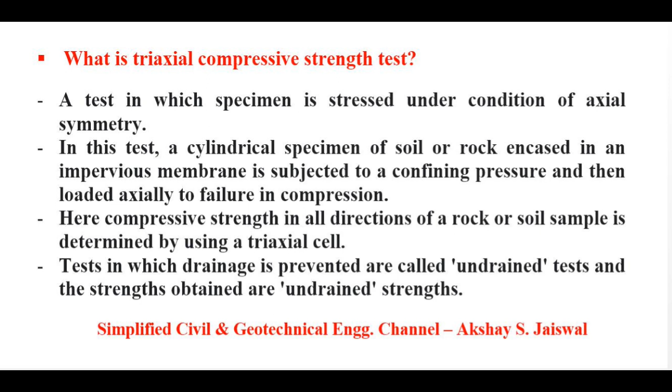Now we will discuss types of triaxial test. There are three main types. First is unconsolidated undrained test, also called Q or quick test. Second is consolidated undrained test, also known as S or slow test. Third is consolidated drained test, also called R test.

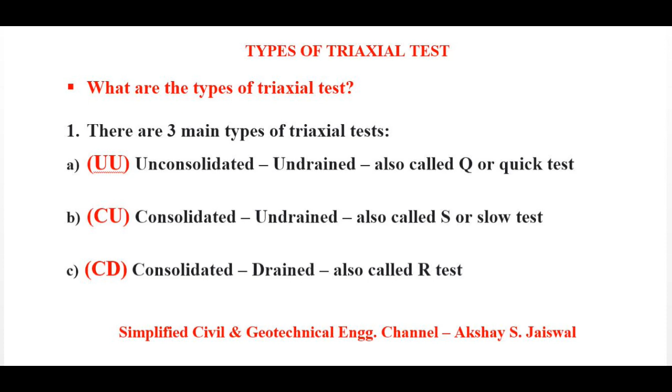Now we will see use of triaxial test. Point number 1, like cone penetration testing, triaxial testing is used to measure soil properties.

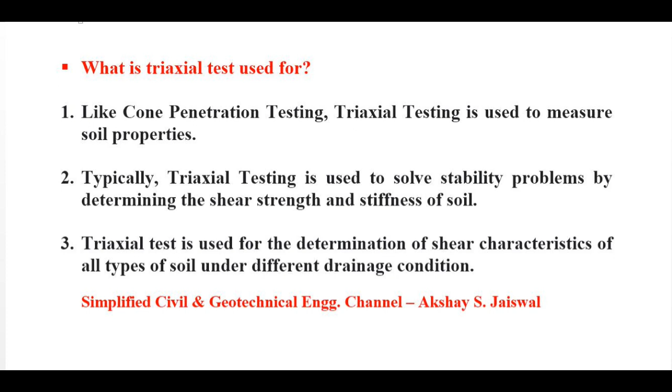Now we will see how you do a triaxial test. Triaxial shear testing can be conducted in two steps. Step 1, the soil sample is prepared and set in the triaxial cell, then the confining pressure is applied. Step 2, deviator stress is applied, which is an additional axial stress.

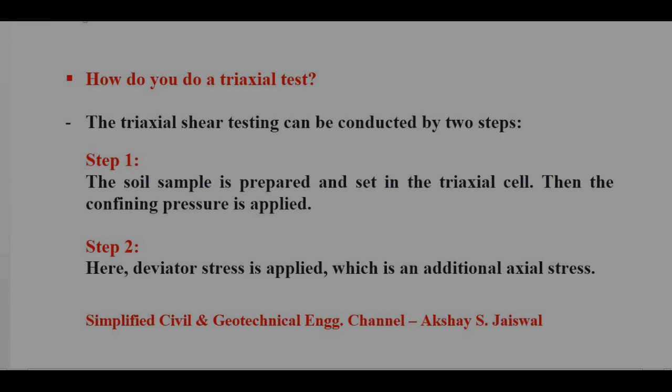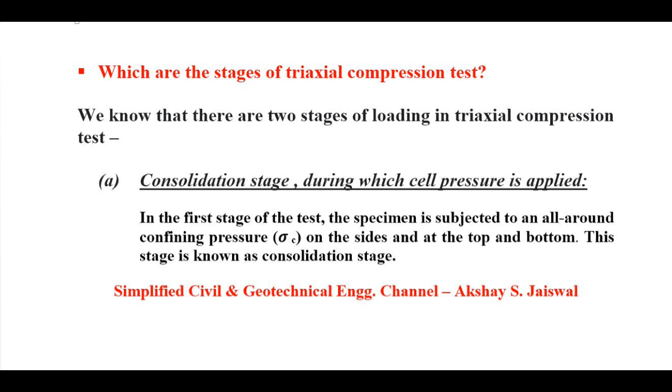Now let's discuss the stages of triaxial compression test. There are two stages of loading. First is consolidation stage, during which cell pressure is applied. In the first stage, the specimen is subjected to an all-around confining pressure, that is sigma C, on the sides and at the top and bottom. This stage is known as consolidation stage.

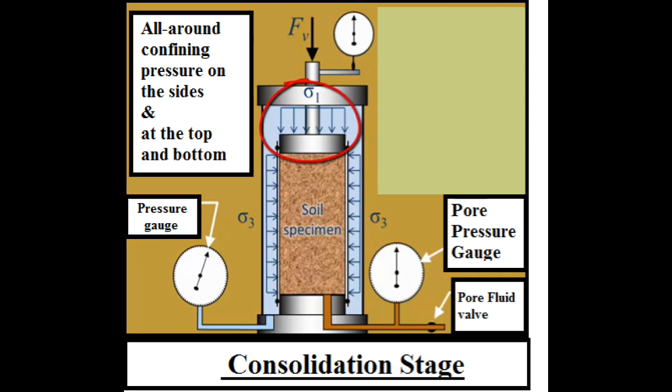This figure shows all-around confining pressure on the sides and at the top and bottom. The figure also shows the pore pressure gauge and pore fluid valve and pressure gauge.

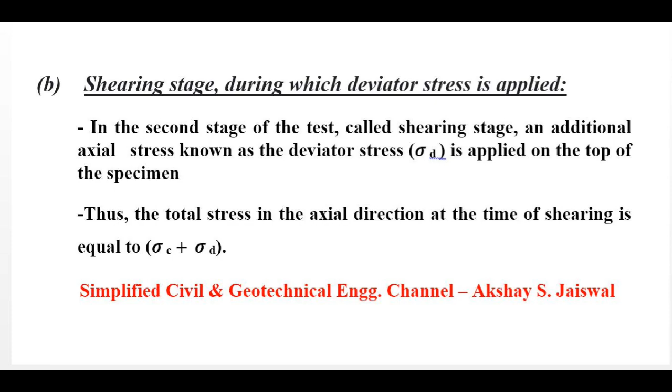Now we will see the shearing stage, during which deviator stress is applied. In the second stage, called the shearing stage, an additional axial stress known as the deviator stress sigma D is applied on top of the specimen. Thus, the total stress in the axial direction at the time of shearing is sigma C plus sigma D. This figure shows the shearing stage during which deviator stress is applied.

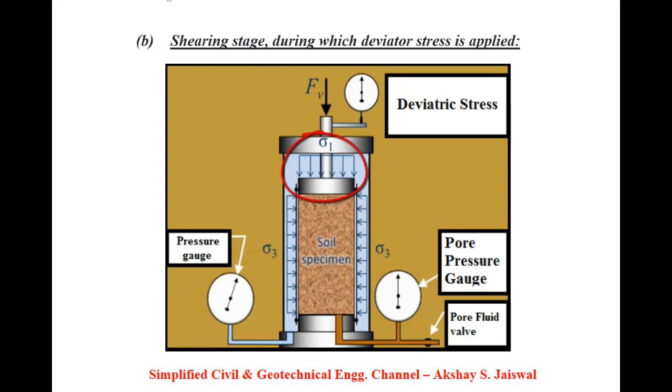Our next point is major and minor principal stresses. Point 1, in this test the specimen is stressed under condition of axial symmetry. Point 2, the vertical sides of the specimen are principal planes as there are no shear stresses on the sides. Point 3, the top and bottom planes are the major principal planes. Point 4, the confining pressure sigma C is equal to the minor principal stress, sigma 3.

Point 5, the total axial stress is equal to the sum of confining pressure sigma C and the deviator stress sigma D, which is the major principal stress, denoted by sigma 1. Point 6, because of axial symmetry, the intermediate principal stress sigma 2 is also equal to the confining pressure sigma C.

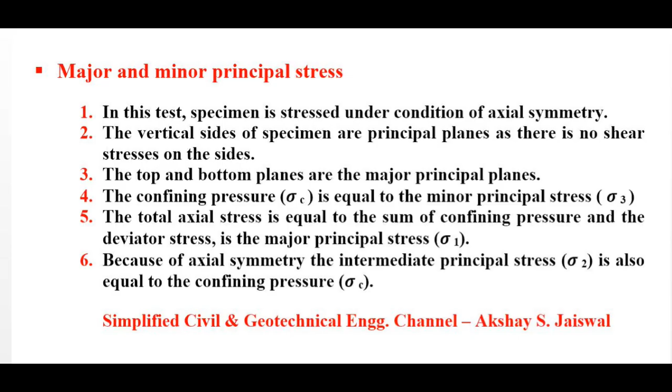Now we will discuss the main features of triaxial test apparatus. It consists of a circular base that has a central pedestal.

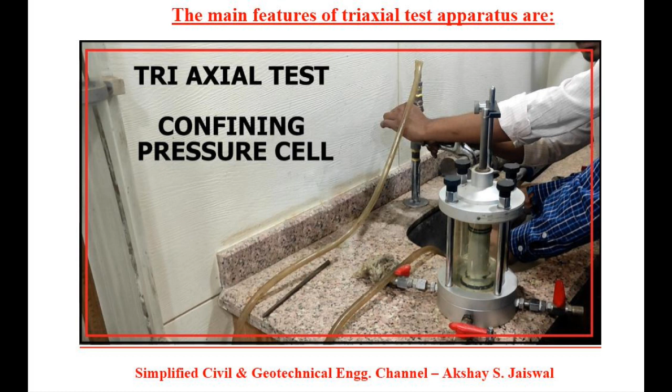Now we are going to discuss the advantages of triaxial test. Point 1, the advantage of this test over other test methods is that the specimen drainage can be controlled and pore pressure can be measured directly.

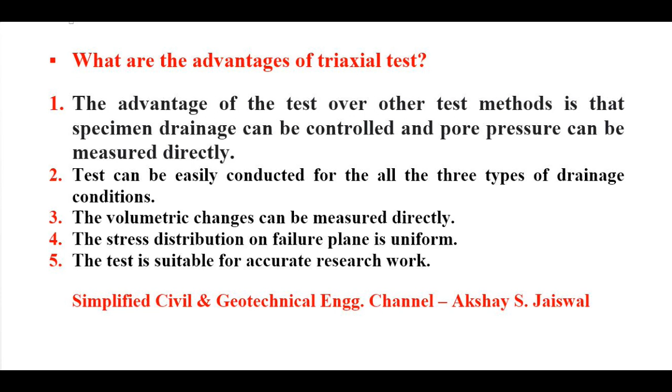Point 2, the test can be easily conducted for all three types of drainage conditions. Point 3, the volumetric changes can be measured directly.

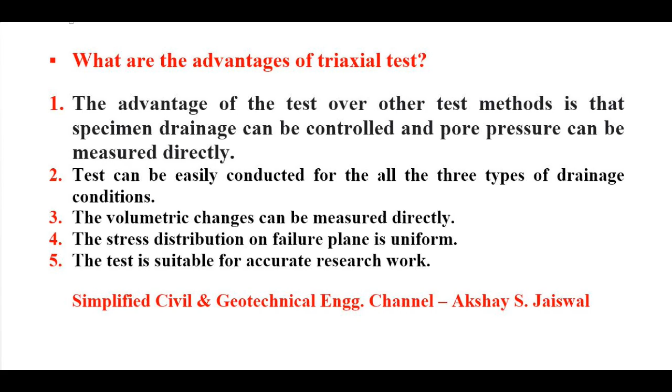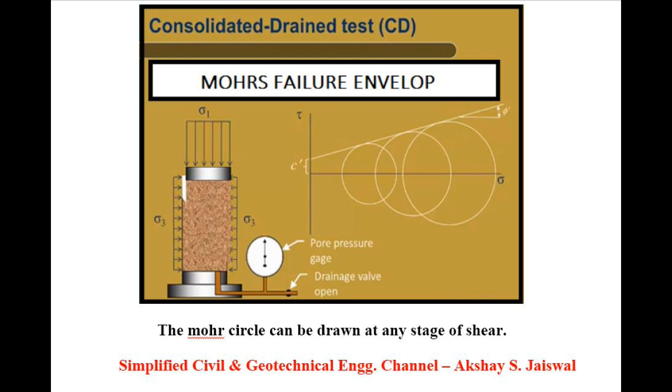Point 4, the stress distribution on the failure plane is uniform. Point 5, the test is suitable for accurate research work. The specimen is free to fail on the weakest plane. And the Mohr circle can be drawn at any stage of shear.